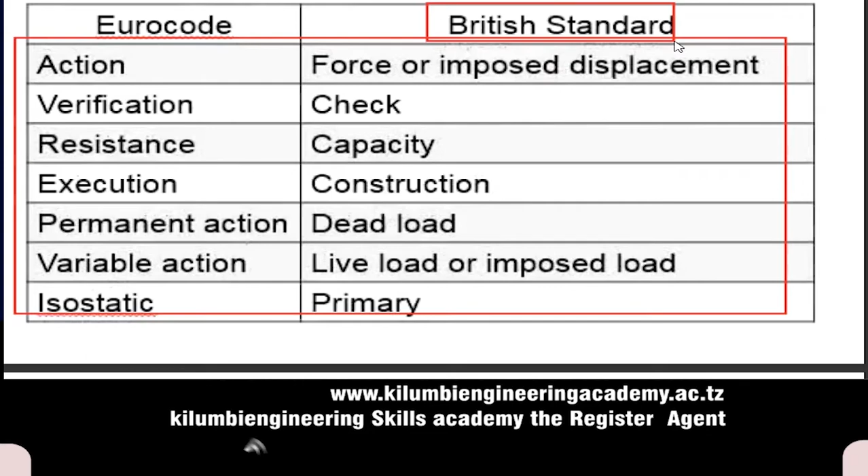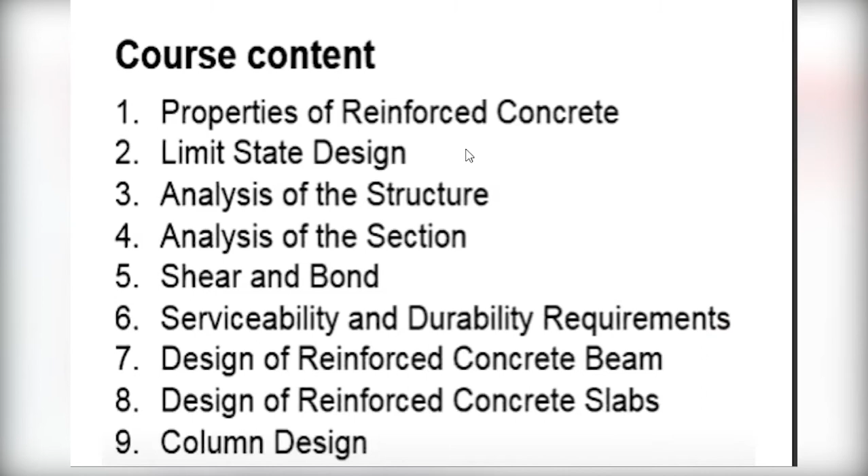Now, first, as we said, we start with the properties of the concrete. The properties of reinforced concrete are as follows: there's a so-called composite of concrete and steel. The steel bar is embedded in the concrete to strengthen the concrete in the tension area. We always say the concrete is good in compression.

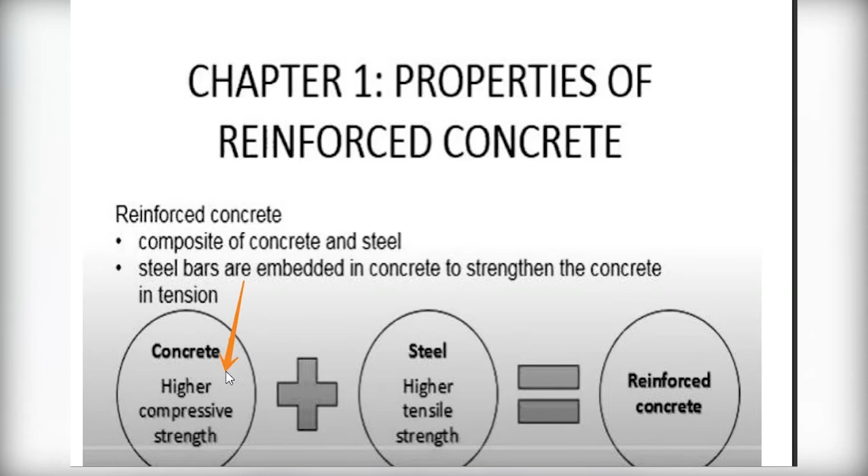So general properties of concrete: it is higher in compressive strength, and if you add the so-called steel or steel bars, which have higher tensile strength, what you get is the addition of the compressive strength plus the tensile strength from the bar, you get the so-called reinforced concrete. That's why we call it concrete which is reinforced—it means concrete which is added with steel bars. So the definition of reinforced concrete is the summation of the concrete including the bars.

If it has no bars, it is called mass concrete. So the general properties of concrete are: it has the highest compressive strength.

Now, the general introduction. Reinforced concrete combines the best features of concrete and steel, which are complementary, as follows.

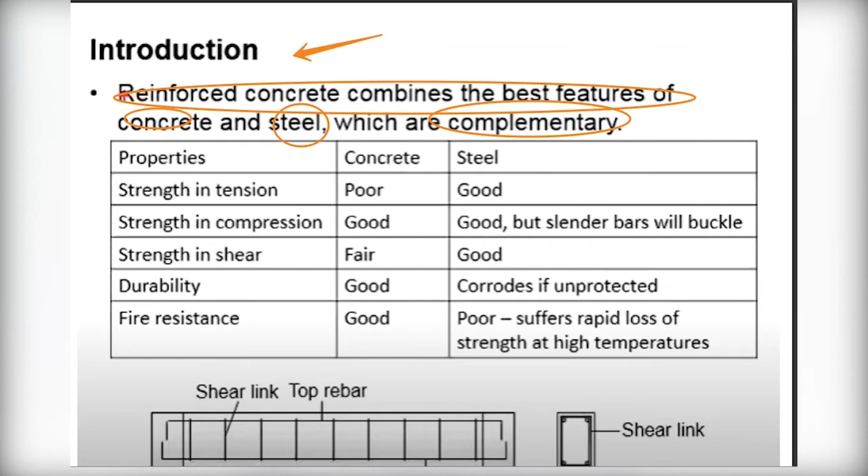Now the properties: here we have the concrete and here we have the steel bars. In terms of strength in tension, the concrete is poor, but the steel bar in tension is good. But in terms of strength in compression, the concrete is good, but the steel bar, if it is slender, will buckle. So note that the steel bar is not much good in compression, but it is good in tension. Once it is slender, the bar will buckle automatically.

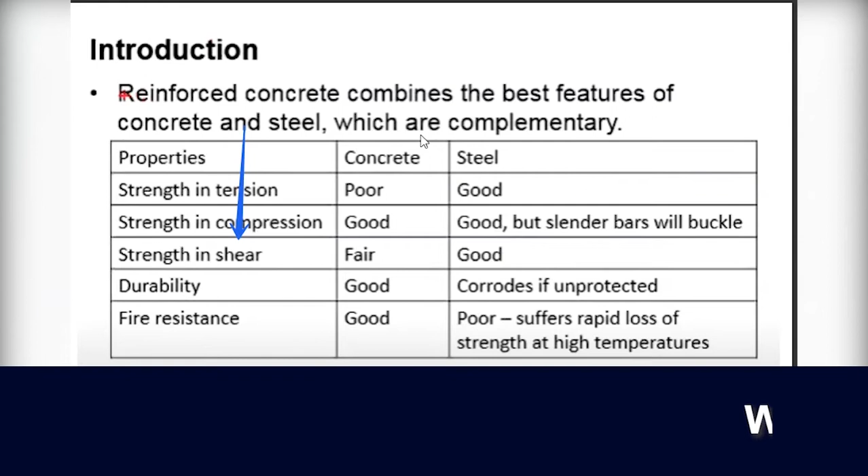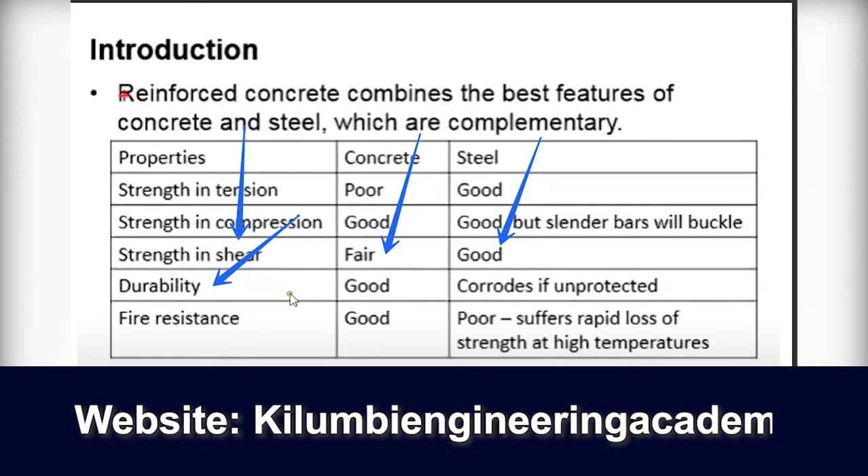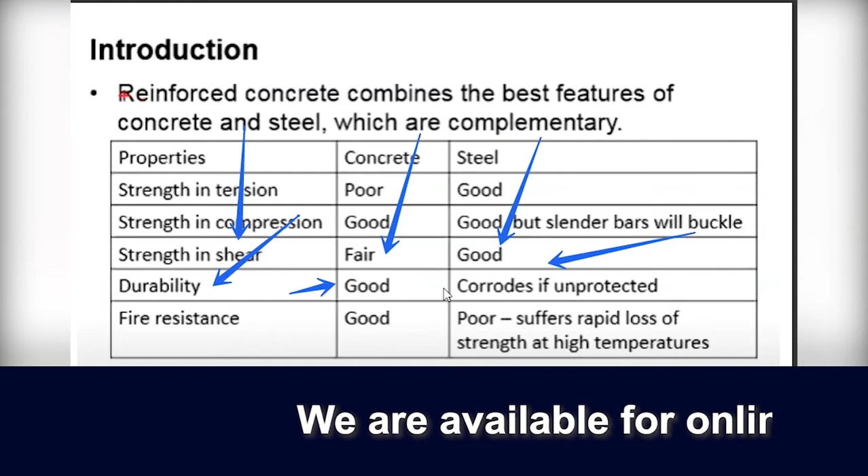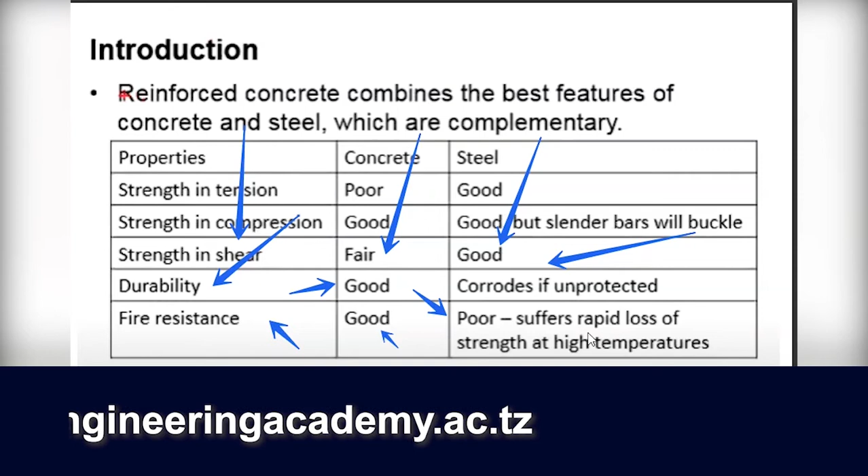Now, in terms of shear, the concrete is fair, while the steel bar is good. In terms of durability, the concrete is good, but the steel bar corrodes—if not protected, the steel bar will rust. In terms of fire resistance, the concrete is good, but the steel bar is poor—it suffers and rapidly loses its strength once the temperature is very high.

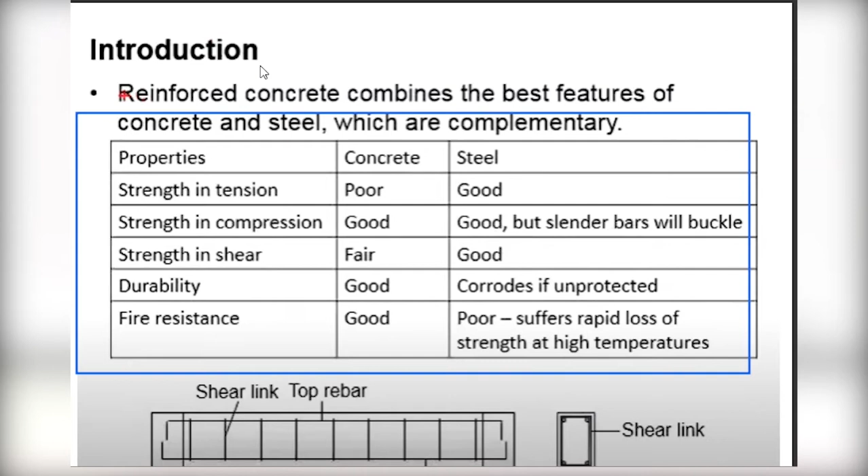So that is the general properties in both members, in terms of concrete and in terms of steel.

So comparing concrete and steel: in terms of tension, concrete is poor, but steel bar is good in tensile strength. Vice versa, in terms of compression, concrete is good, while steel sometimes buckles automatically. In terms of shear, concrete is fair, steel is good. In terms of durability, concrete is good, while steel corrodes once not protected. In terms of fire resistance, concrete is good, while steel is going to lose its strength at higher temperatures.

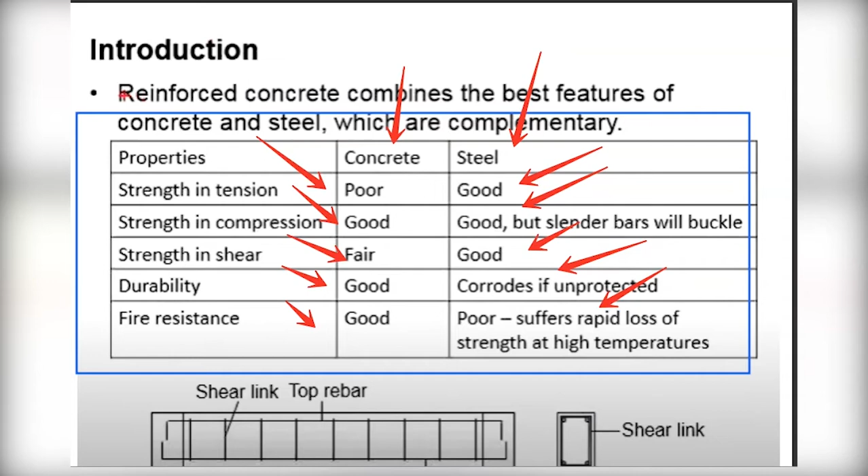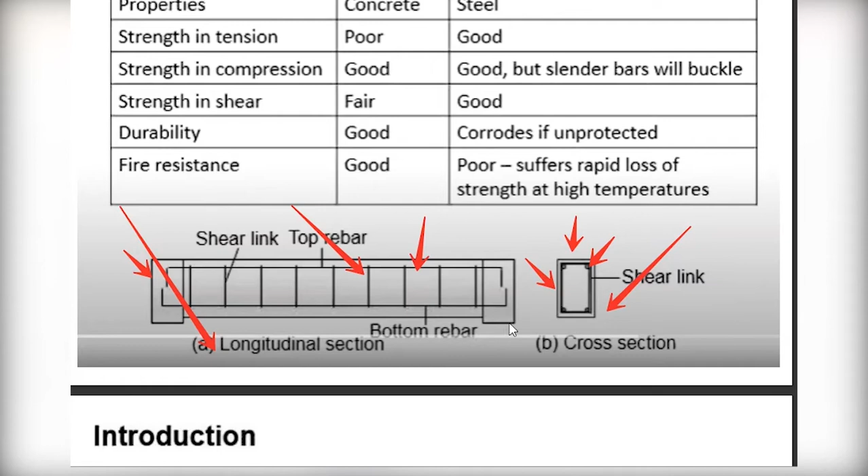So that's the general summary, and this shown here is some of the members in terms of longitudinal and cross-section. In longitudinal section, these are the bars and this is the concrete in the member—the bar is inside the concrete, that's what we call reinforced concrete. In terms of sections, you see the sections, the shear links, and the main bar, like that—that's the cross section of the members.

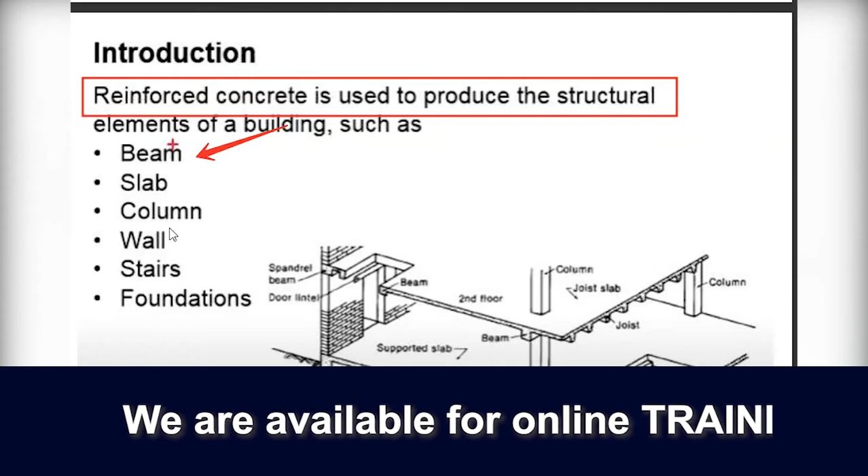So, general introduction: reinforced concrete is used to produce the structural elements of a member, building, or structure. Such structural members include the beam, the slab, the column, the wall, the stair, and the foundation. Here are some of the members—this is the stair.

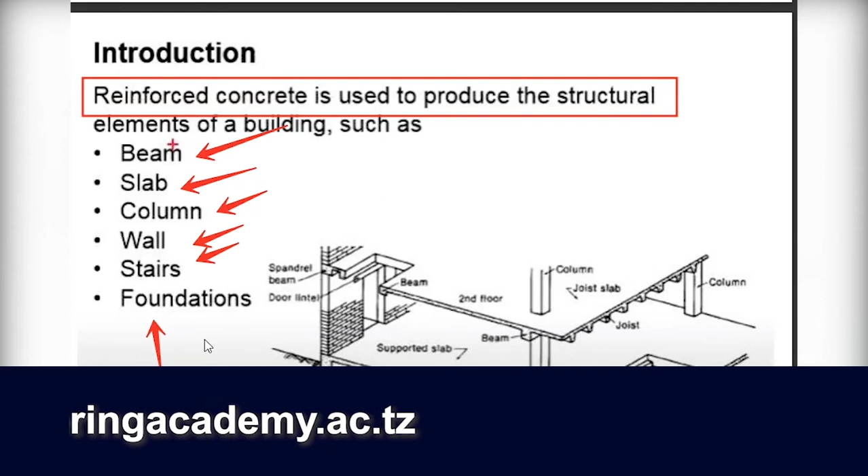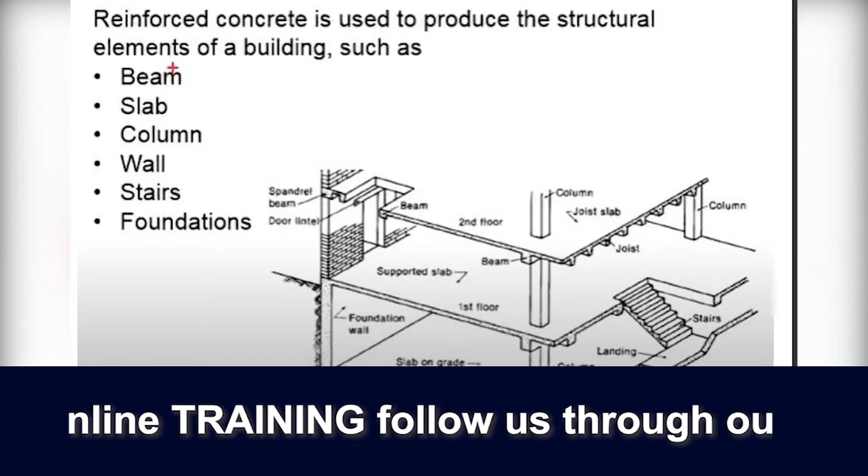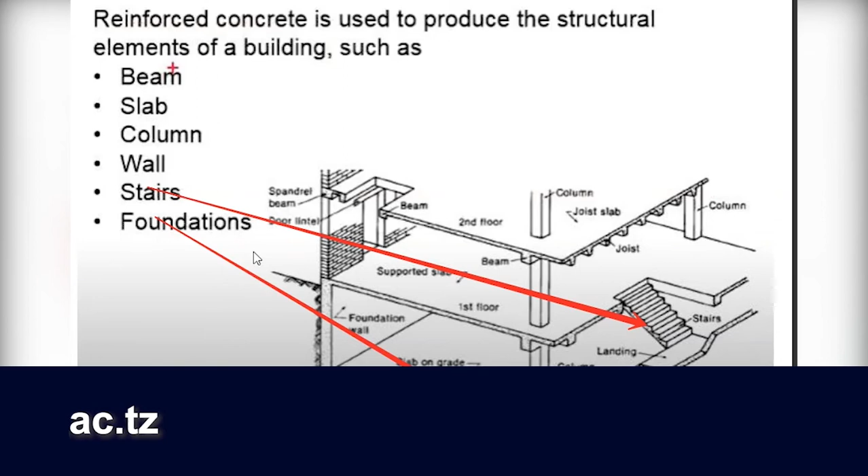This is the foundation sample, pad foundation, and this is the sample of the stair. If you consider about the wall, it depends - sometimes it might have like this one, and this is the column.

The slab is like this one, and the beam is the one which carries the slab. So the beam might be like this one underneath of the slab, or like this one underneath of the ribbed slab. So those are some of the members in the structures.

So to ensure the structure is safe and suitable for occupancy with minimum cost, stage 1 we need to have the so-called planning. In planning, there is a client summary, there is a function of the planning, the nature of the structure usually, environmental structure factors, economical factors, site survey, and the structural configurations. These are all in the planning stage.

While in stage 2, the structural analysis, here we consider the design constraints, the action, the static equilibriums. This is in terms of force, reaction, internal forces, the moment, the shear, etc. The material properties, strength, elasticity of the material - everything is in this second stage.

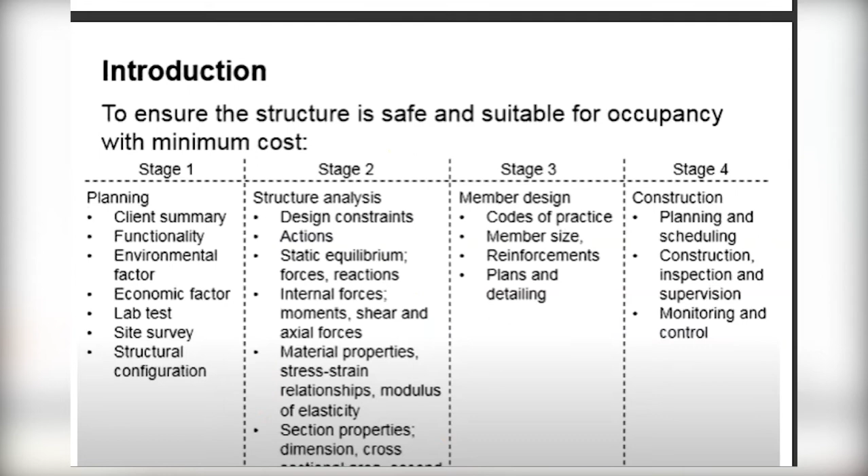Once you consider the second stage, these considerations should be taken into account, as described here. You pass through and can see in the second stage which considerations should be taken.

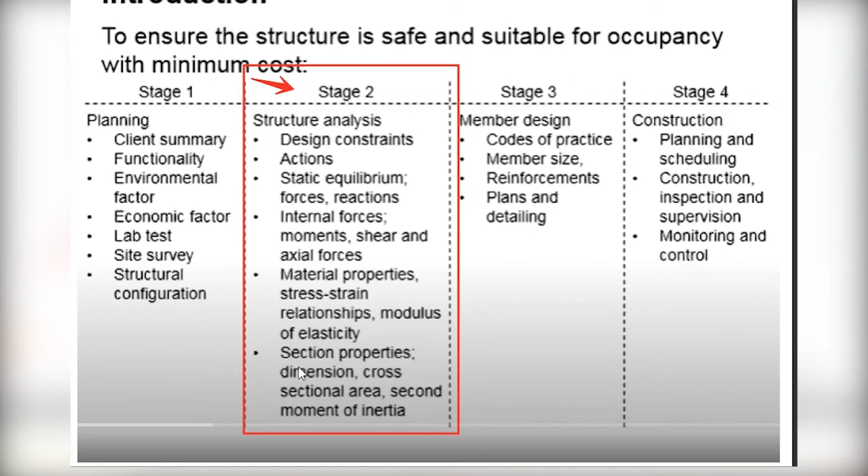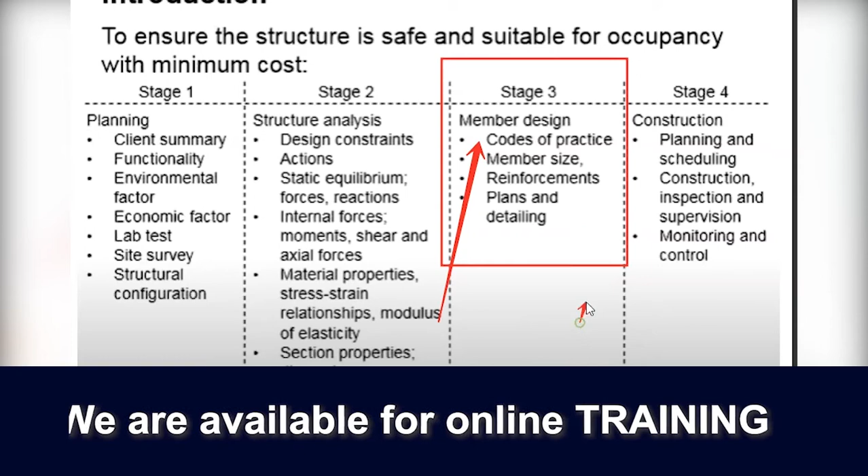So on the third stage, you consider the member design. Once you consider the code of practice, maybe you use BS code, or Euro code, or Indian code, Brazil code, etc. It depends on the nature, whether it is reinforced concrete or steel structure or bridge structure, whatever. All this consideration is in stage number 3.

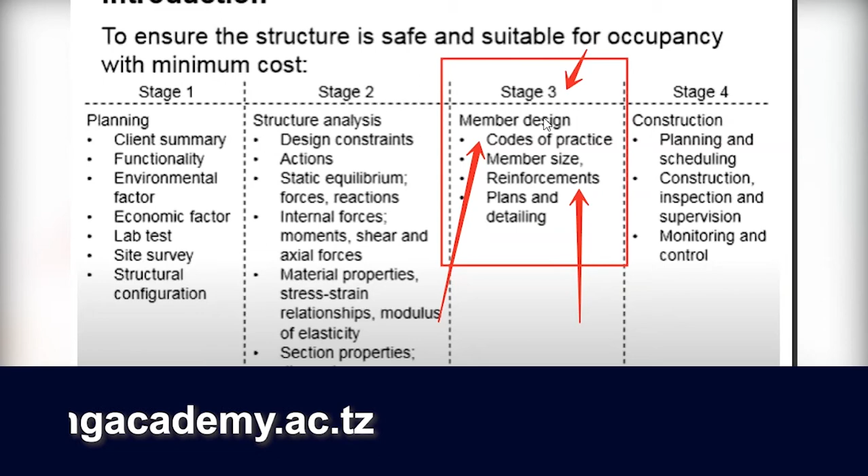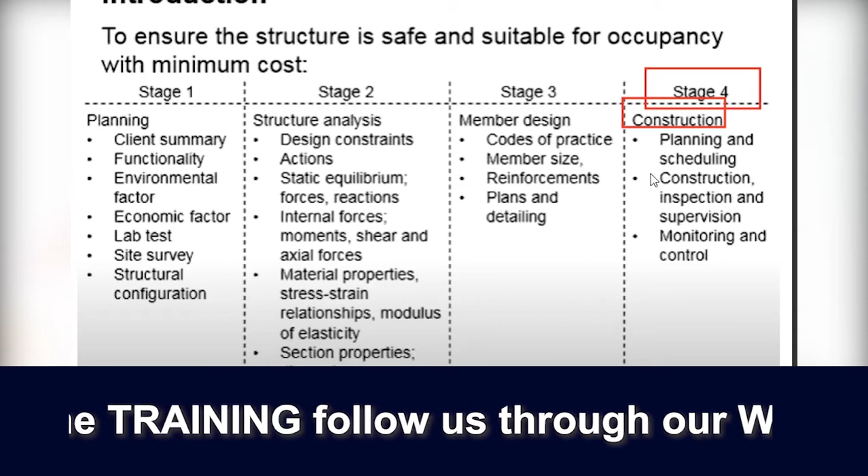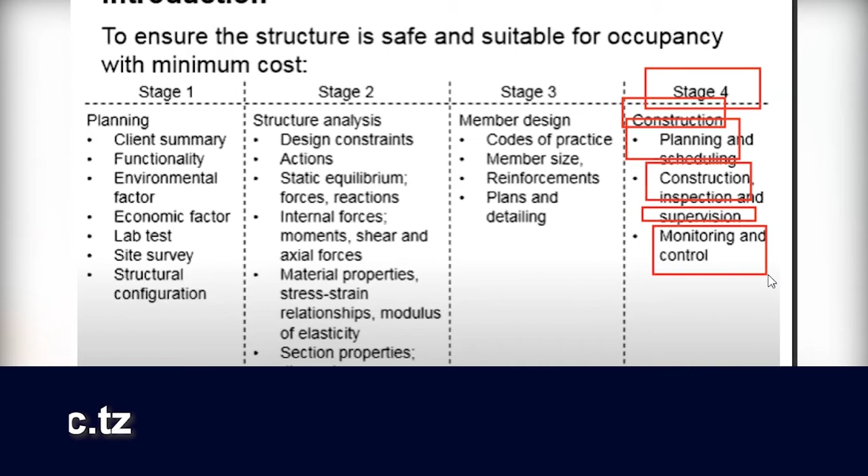And once you go to stage number 4, this is the construction stage. Here is the way you implement both the planning stage and the construction, the inspection, the supervision of the structure, and the monitoring and quality control. Both of these are at stage number 4.

So the composite action - concrete is weak in tensile, about 10% of the compressive strength. Now, the design assumption is as follows. We say that concrete does not resist the tensile strength - this is the first assumption. The second assumption: the reinforced steel carries only the tensile force, in which it transfers the bond between the interface of the two materials.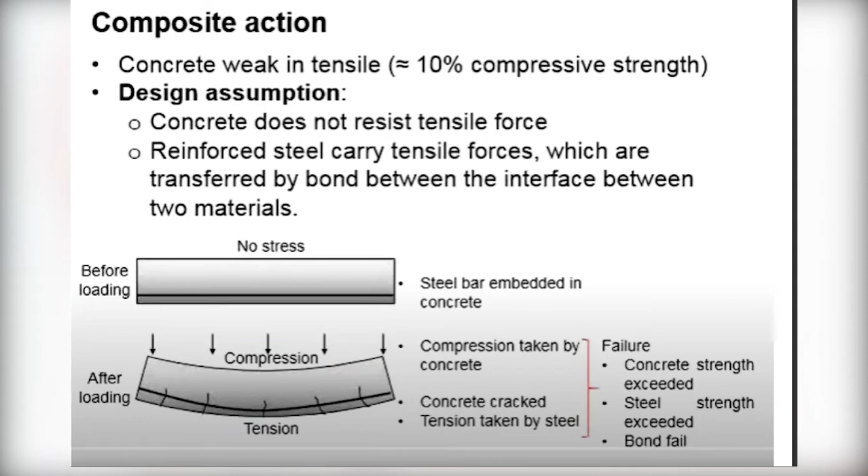So before there is no stress, the member will be horizontal like this one - here no load is applied, meaning no stress appears, as if you have your member and there is no load appearing above or on top of it. But once you load it, the upper part appears as compression, and this is the part of the concrete. It means it appears as compression, while the bottom part appears as tension. So by this way, we assume our member is in compression above while it is in tension below. This is after loading - here is before loading.

So by that way, we can say that the above part takes the compression - that is the concrete, while the bottom takes the tensile - that is the steel bar. So you have compression and tension. That's why failure occurs: once the concrete strength is exceeded, or once the steel strength is exceeded, or the bond fails - meaning the bond between the concrete and the reinforcement fails. So always the member will appear to fail.

These are the general rules, the general explanation of how the concrete member appears once it is loaded or before loaded. As we said, before loading there is no stress, and after loading the top part is compression while the bottom part is in tension. So this is how the assumption comes: we assume that the concrete has no tensile force, meaning the tensile force is all carried by the steel bar member. That's the assumption.

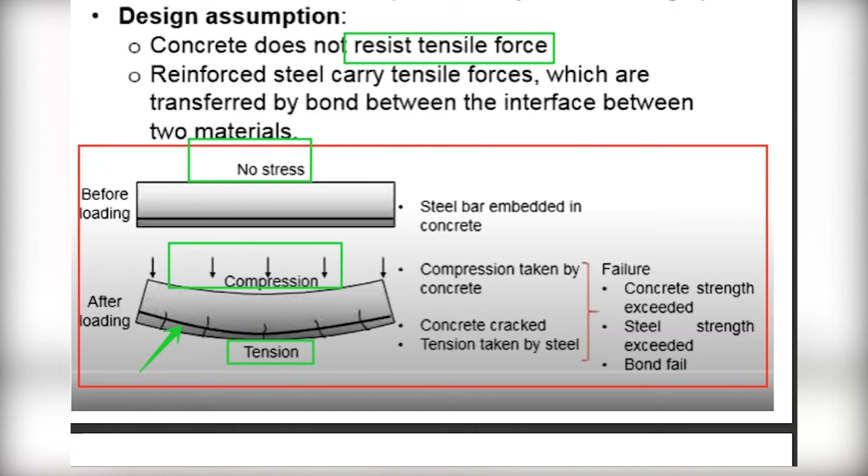Now the composite action. If the bond is inadequate, the reinforced bar will slip, and there will be no composite action.

Also, when the bars are normally ribbed, there is an extra mechanical grip. So the assumption is that the strain in the reinforcement is equal to the concrete, meaning the grip depends on the nature of the reinforcement, whether it is plain or ribbed.

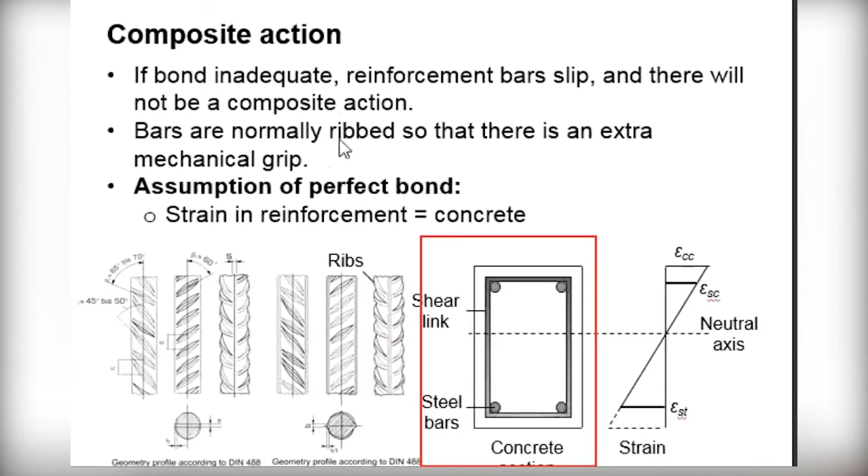So by the assumptions, if this is the section of the member of the concrete - now if we consider this section of the concrete member - the centroid or the neutral axis is assumed like here.

This means the above part appears as compression, while the bottom part appears as tensile. Means if you have the triangular - if we take this one as a section like this, and this is the center or the centroid of the member, your properties appear like this one. The above part appears in compression, while the bottom part appears in tension.

This portion has a force for the compression - the force for the concrete, while the bottom one is resisted by the tensile. As we assume the concrete has no resistance to tensile, the bottom one is only resisted by the tensile bar, while the top one we assume is resisted by the concrete. So the upper one is compression, while the bottom one is tension.

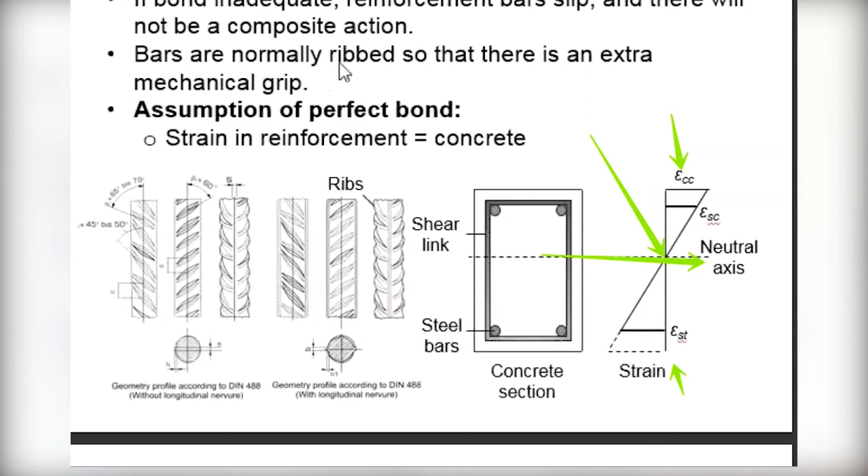Now we look at the so-called stress-strain relationship. The relationship between stress and strain is as follows: the load on the structure causes distortion of its member, resulting in stress and strain of the concrete and the steel or reinforcement bar. This analysis of stress and strain is based on equilibrium of the forces.

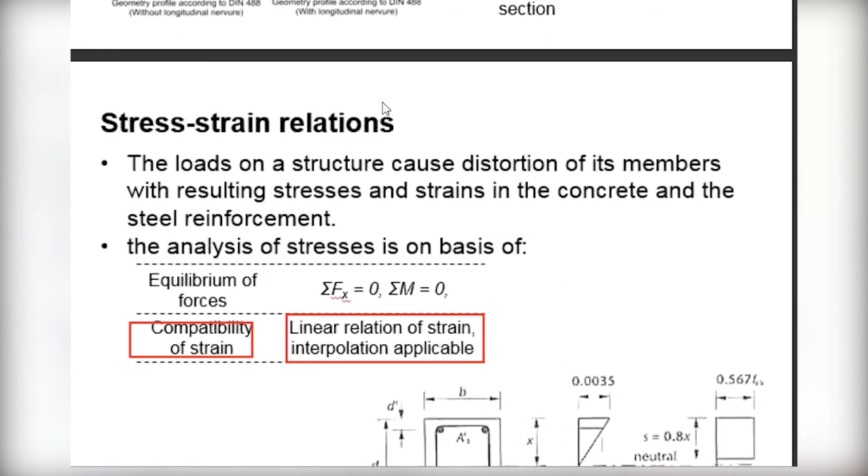The horizontal force is equal to zero, and also the moment is equal to zero - this is the basic engineering principle. So if we assume the compatibility of the strain, the linear relationship is developed as interpolation, as we see in the diagram.

As we assume this is the section of the concrete, from the neutral axis like this one, as we said, the above one undergoes compression, while the lower one undergoes tension. This means above we have the strain of the concrete, and lower we have the strain for the steel from the neutral axis here.

But once your section has a depth of D like this one, if you take from the center of your bar above to the top of your section, you create a certain distance, say D dash. The distance from above to the neutral axis is assumed as x.

Also the width is carried as b, and below we have the area for the reinforcement, or As, and above we have the area of As'. So the strain relationship is like this one. As we said, this is like a triangle.

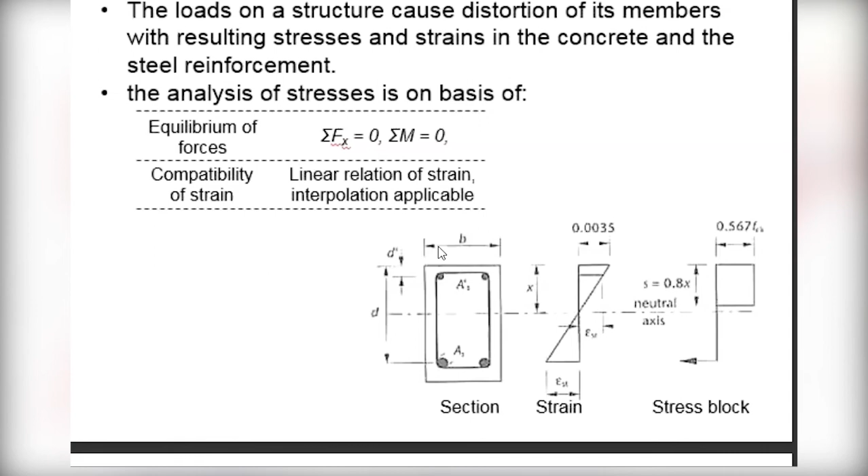So we have the so-called stress block, and this was the strain relationship, meaning the stress-strain relationship. So now, what is the so-called concrete strength? The concrete increases its strength with age. The rate of increase also decreases with age. We assume the concrete matures at about 28 days. So Eurocode 2 does not permit the use of the strength above 28 days in calculation.

So we assume the concrete strength at the age of 28 days is the assumed strength. So if it is grade 30, after 28 days we assume the strength will meet the assumed strength of the concrete. Empirically, we say after 3 days it is 1/3, after 7 days the strength should be at least 2/3, and after 28 days the full strength appears. So that is how we assume the concrete strength after casting.

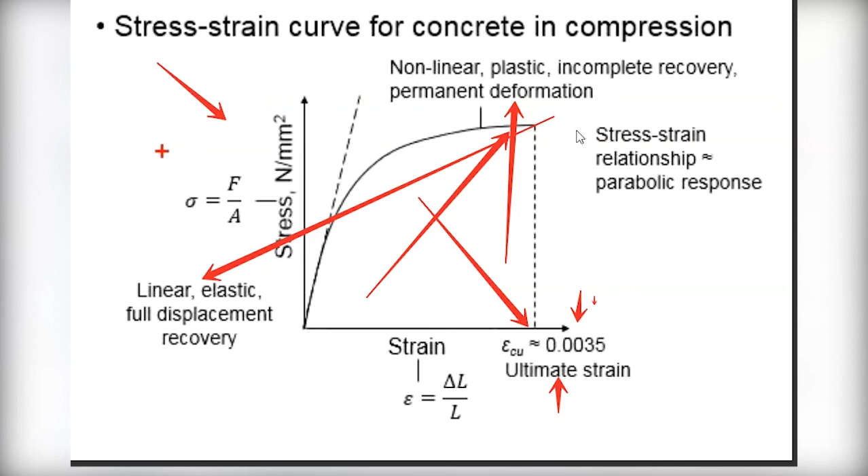The value is estimated empirically as 0.0035, and this is the assumption for the ultimate strain, at which the member, once loaded and stressed, undergoes permanent deformation. It won't go back to its original dimension. That's why we say the stress-strain relationship is the so-called parabolic response. Under that circumstance, the stress-strain relationship of the concrete is of this nature.

Now, as we said, the nature is sometimes linear, and then it becomes parabolic once it is loaded. So the value for the stress or the strain is this one here. But this is the so-called design stress, and the design stress is lower than the characteristic strength of the stress-strain relationship.

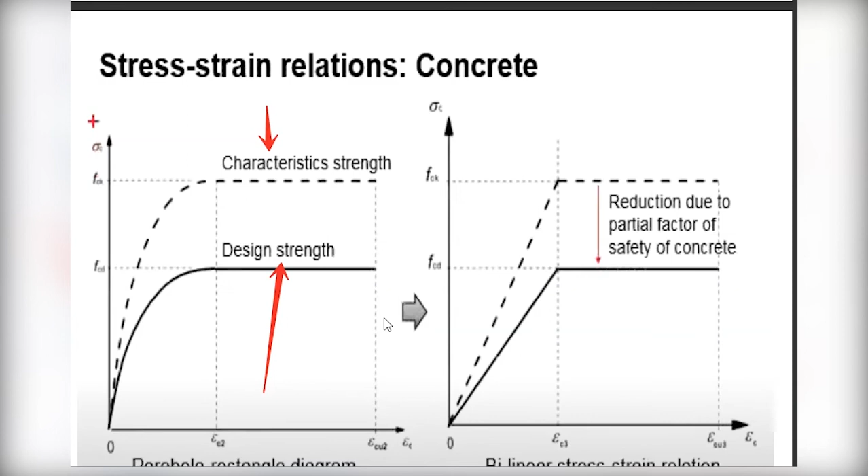Because this is parabolic in nature, they said that the design stress is lower than the characteristic strength. It means if the characteristic strength is fck, the design strength is fcd. This is reduced by a certain percent, and the reduction is due to the so-called partial safety factor.

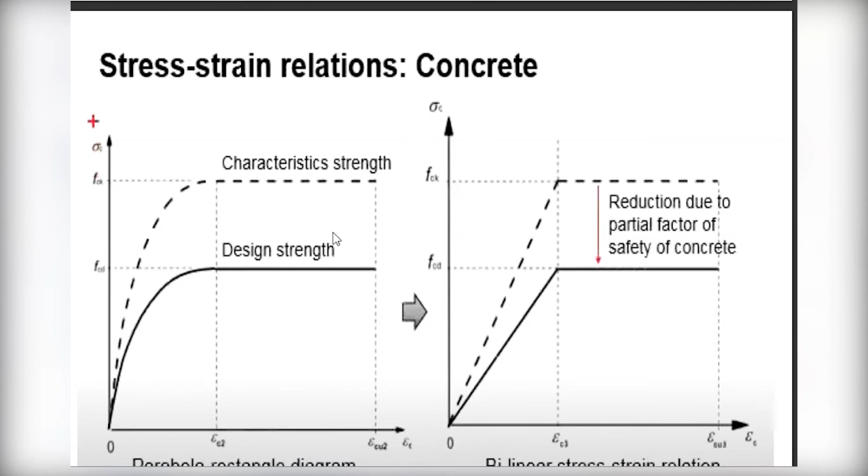It means we assume the structural member can suffer the consequences of something unforeseen. So we must have a so-called factor of safety to account for any contingency in the structural member. That's why we say the relationship is bilinear, a bilinear stress-strain. This is for simplicity: we assume it is linear, while normally it is parabolic.

That's why if we assume it is equivalent to linear, a certain percent is reduced from the characteristic strength of the concrete to the design strength. The design strength is always lower than the characteristic strength. That's the point to note. The amount which is lowered is given. Let's proceed.

Now, the stress-strain relationship of the concrete. The compressive stress has traditionally been measured and expressed in terms of cubes. How do we measure it? We measure it from a 150 mm cube under crushing. After 28 days, we have the characteristic strength, or compressive strength, of the concrete.

We can also measure it from a 150 mm diameter cylinder, about 1 foot long, or about 300 mm or 30 centimeters long. The cylindrical strength is estimated at about 60% of the cubical strength. So the equivalence between cubical and cylindrical is that cylindrical is taken as about 60% of the cubical.

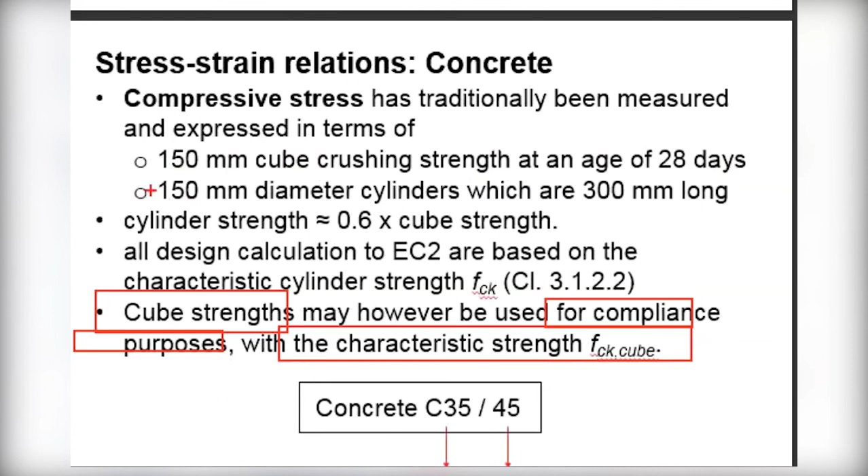Now all the design calculations in the Eurocode are based on the so-called characteristic cylindrical strength. This is under this clause, which you can follow in your own time. The cubical strength may, however, be used for compliance purposes, in which the characteristic cube strength is as follows, for example grade 35 to 45.

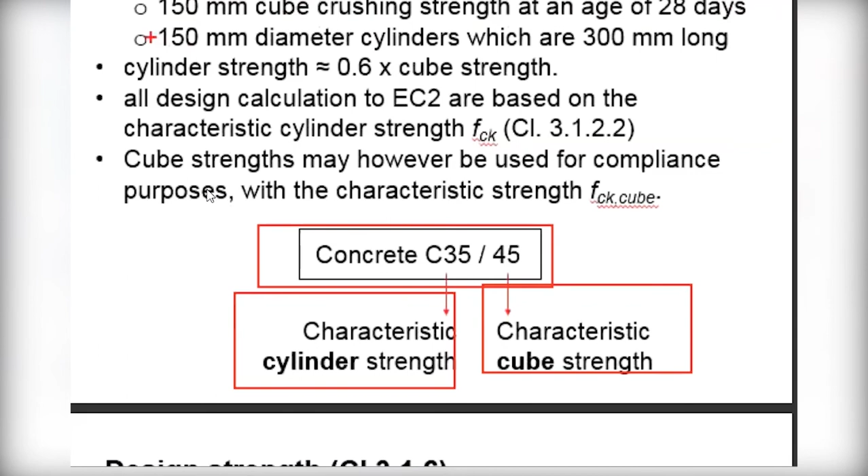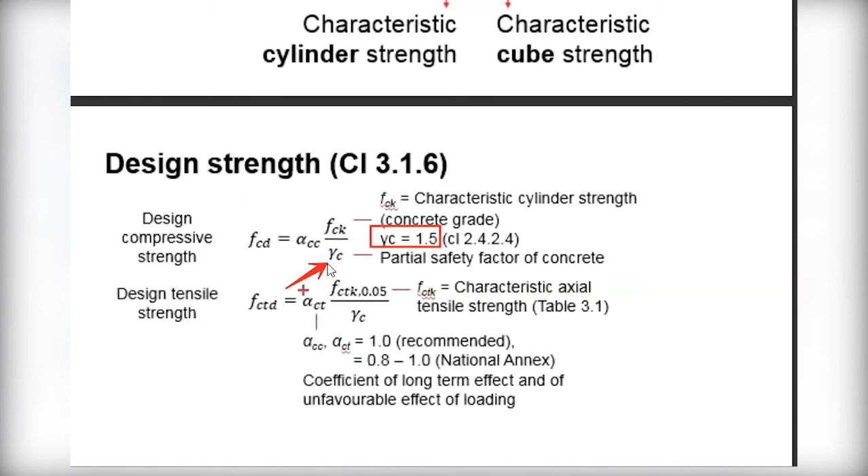Now you can go to clause 3.1.6, where we have the following. fck refers to the characteristic cylindrical strength. The compressive design strength, fcd, is the coefficient times the characteristic strength over the partial safety factor of the concrete. This refers to clause 2.4.2.4, which gives the partial safety factor of the concrete as 1.5.

For the tensile design strength, it is the same: the recommended coefficient for long-term effects times the characteristic strength over the partial safety factor. The value alpha cc is recommended as 1, or varies between 0.8 and 1 per the national annex. This is the general formula: design strength is the characteristic strength reduced by the partial safety factor of the material, depending on whether it is steel or concrete.

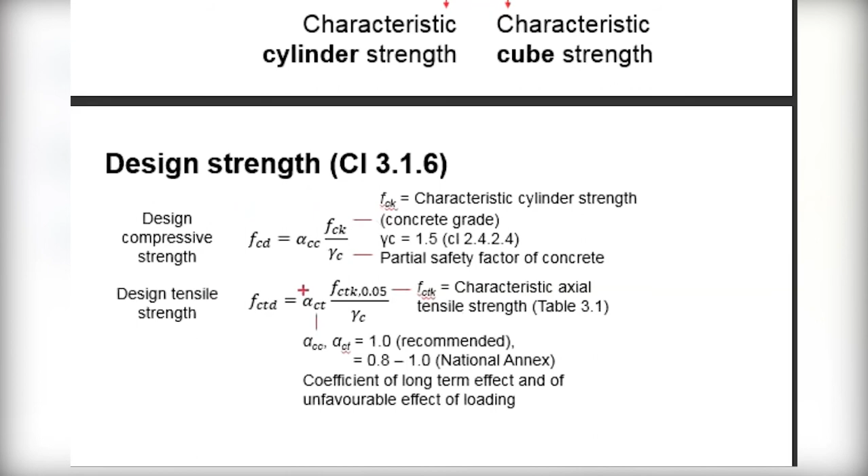From table 2.1 of the Eurocode, the partial safety factor for concrete in the persistent and transient situation is 1.5, while for accidental it is 1.2. For steel, the persistent and transient value is 1.15, while the accidental is 1.0, the same for prestressing steel. This is how you take your partial safety factor according to table 2.1 of the Eurocode.

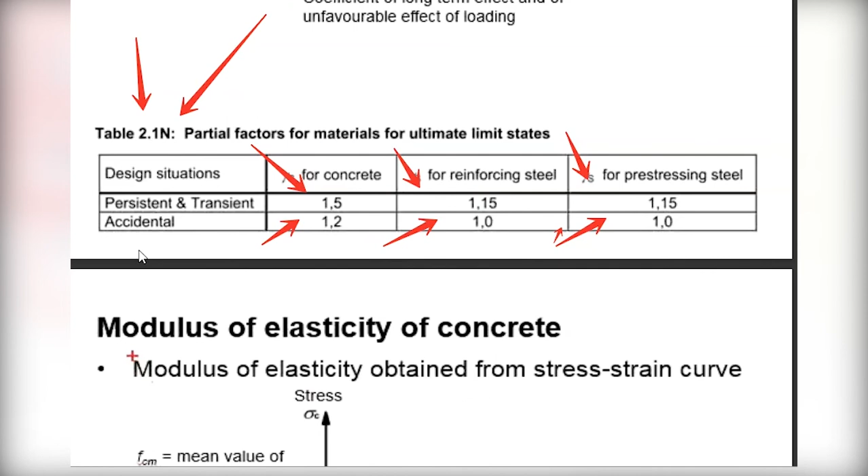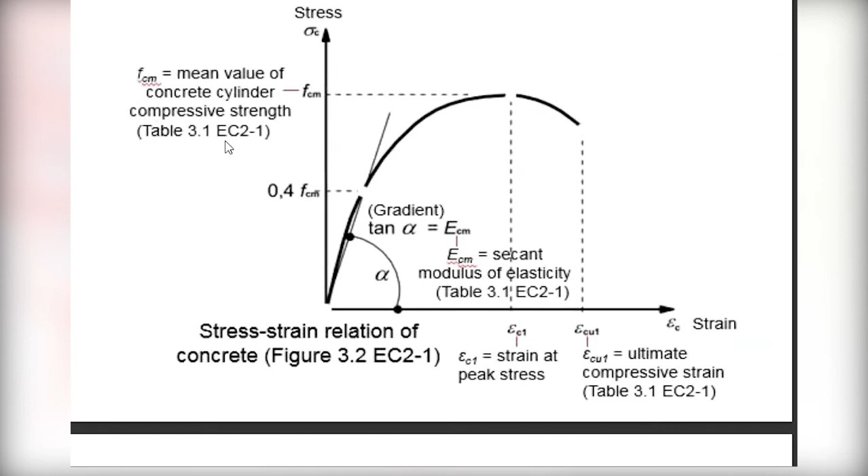Now the modulus of elasticity of the concrete. The modulus of elasticity of the concrete, once you take the relationship of the stress strain, now once you take the relationship for the strain versus stress, you can have, as we said previously, that it is started as linear.

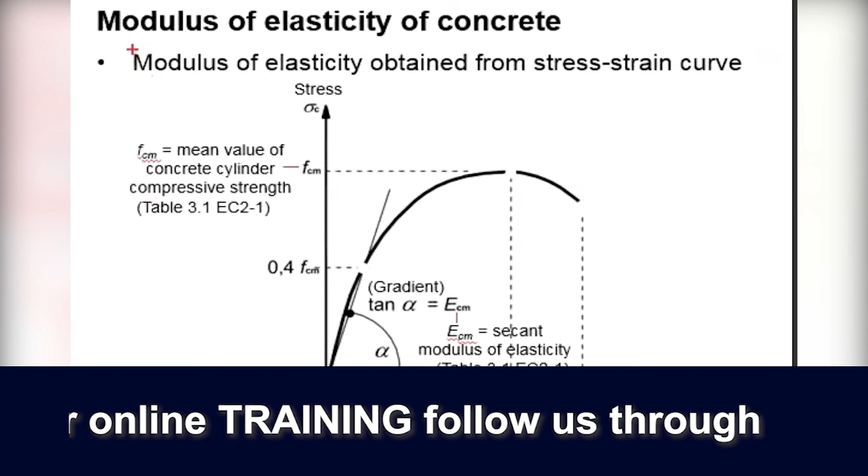The starting point here is linear, but, as we said, it is going to parabolic like this one. So on the linear point, you can have the gradient here. The gradient is at about 40% of the mean strength or characteristic strength. So 0.4 times fcm, but the mean value of the compressive strength is above here.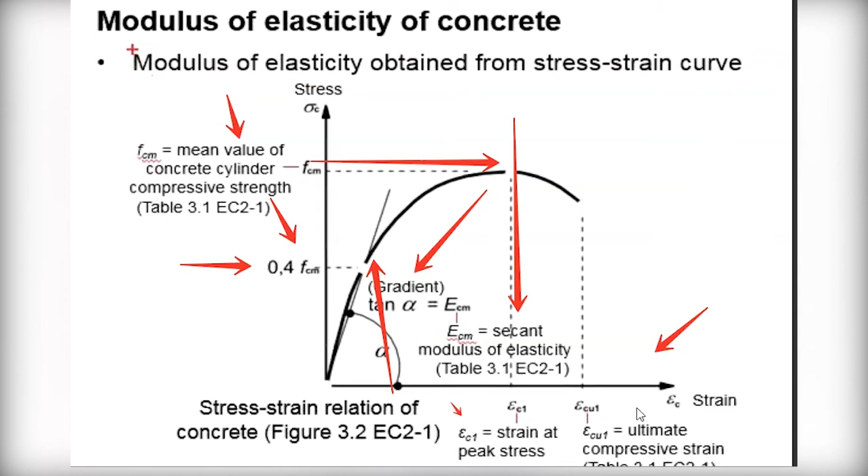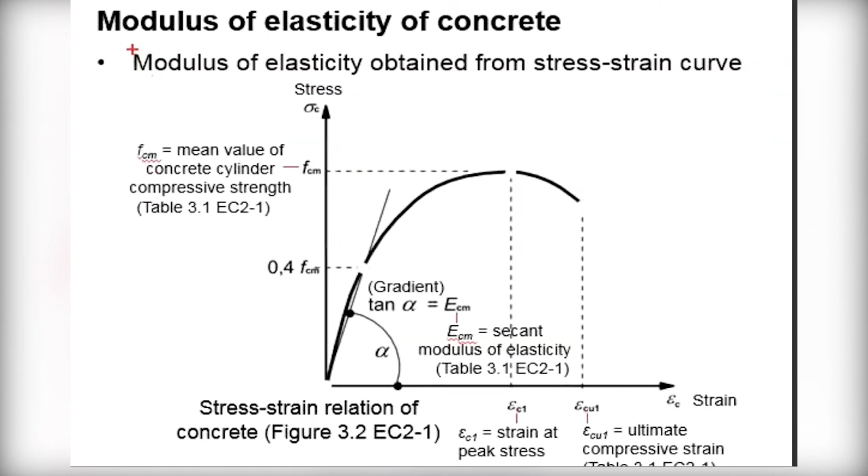So the tangent here, the gradient, is the ratio between the stress versus the strain. So here you can have your strain at peak, and here you have the ultimate compressive strain. It means the strain now is the ultimate, in which the member undergoes the deformation. So now this one you can have from table number 3.1 as per Eurocode.

So from the relationship between the stress and strain, you can define the so-called E. So the tangent means the ratio between the stress versus strain. You have the so-called modulus of elasticity, and by table 3.1 you can have its value. Now if you consider this table, you can have the modulus of elasticity for the concrete.

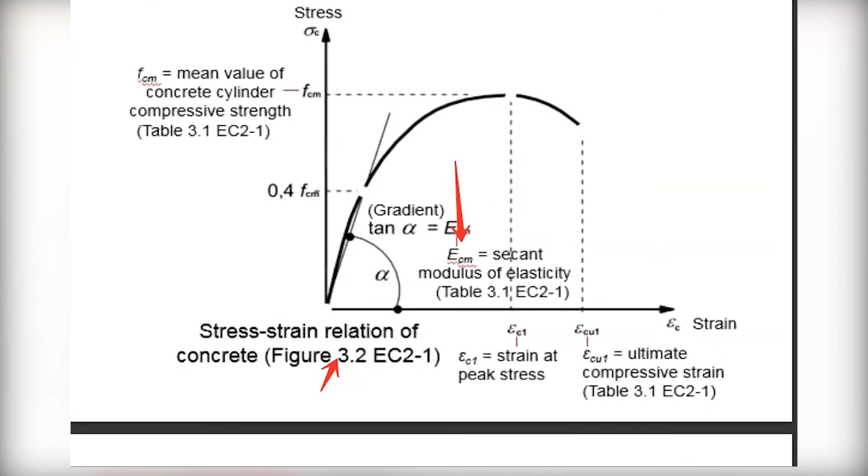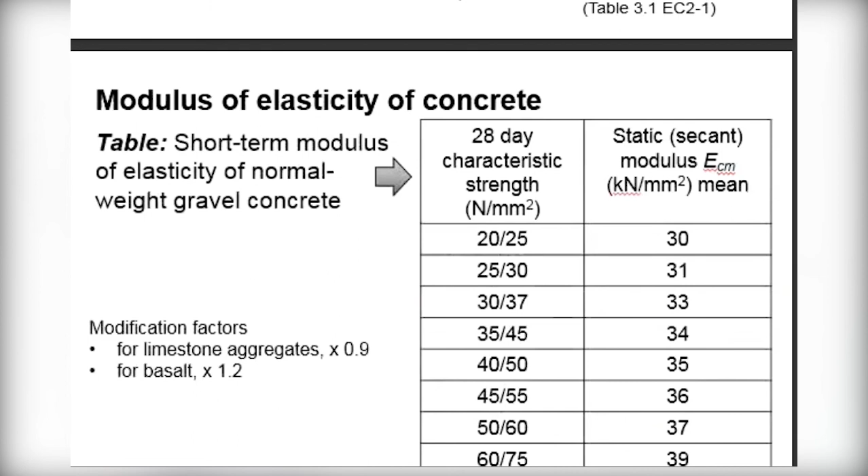Now the value for the E, or the modulus of elasticity of the concrete, as per the table, is a function of the grade strength. If it is assumed a grade 20 to 25, the value of E is about this one. So the value is respective to the grade strength. So you can pass through that table, and you can have whatever estimated value you need. We always say that the modification factor is about 0.9, and this one 1.2, if you want to modify the values which you got.

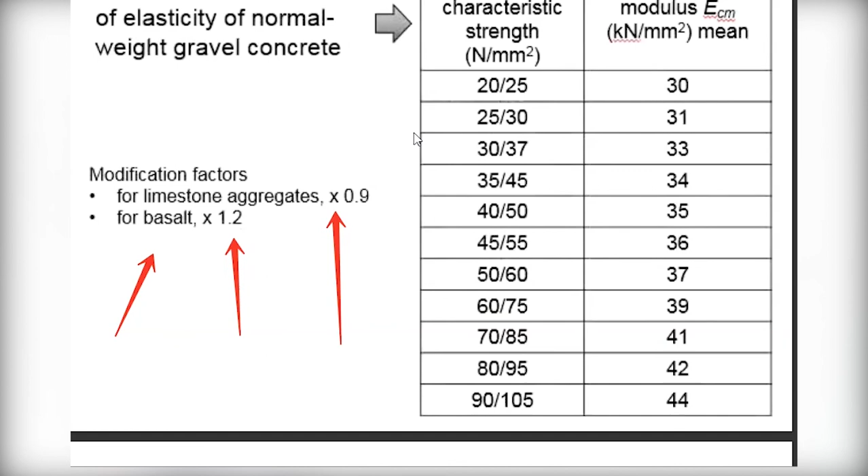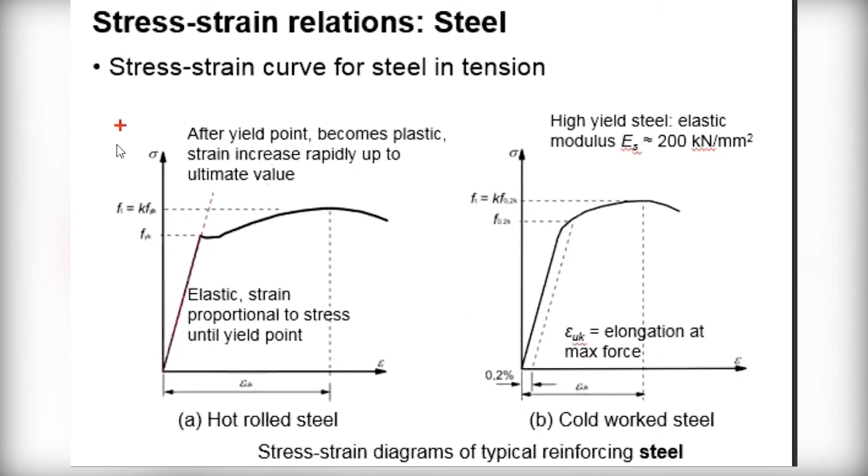Now also, we have the two relationships, as we said, the stress strain relationship. The first one is for the hot rolled, and this is for the cold worked, and this is the high yield E for the hot and cold working steel. Also you can have this nature for the hot rolled. It means here it has got a kink before undergoing the parabolic, while here it is going linearly and straight to parabolic.

This is vice versa, a curve between the hot rolled and the cold worked, and this is the stress strain relationship for the steel once it is loaded, and it depends on whether it is hot rolled or cold worked. The curve is different. Here it goes linear and it starts to lower before going to parabolic, while here it is going linear, changing abruptly to parabolic. And this you can get from this figure as per Eurocode.

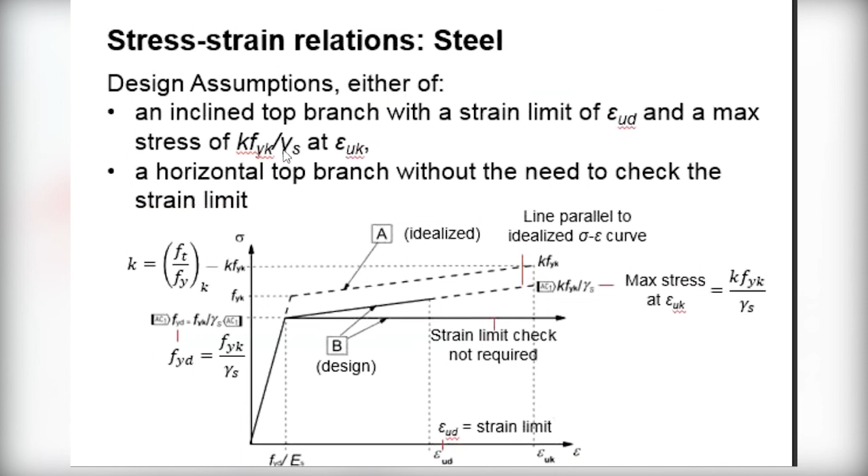Now also for the stress-strain relationship for the steel, we say that the inclined top branch goes to the strain εud, and the maximum stress is k fyk over the partial safety factor at a certain value. Or a horizontal top branch without the need to check the strain limit, as in this graph, which gives the linear relationship. So the value of k is a function of this one, while the design and the characteristic strength, as we said, should be lowered to allow the partial safety factor of the design. So this is the relationship between the strain and the stress for the steel.

So the graph is this one, and this is per the Eurocode figure number, that one, where ft is tensile stress and fy is yielding stress. Now the value for the maximum stress is in this function.

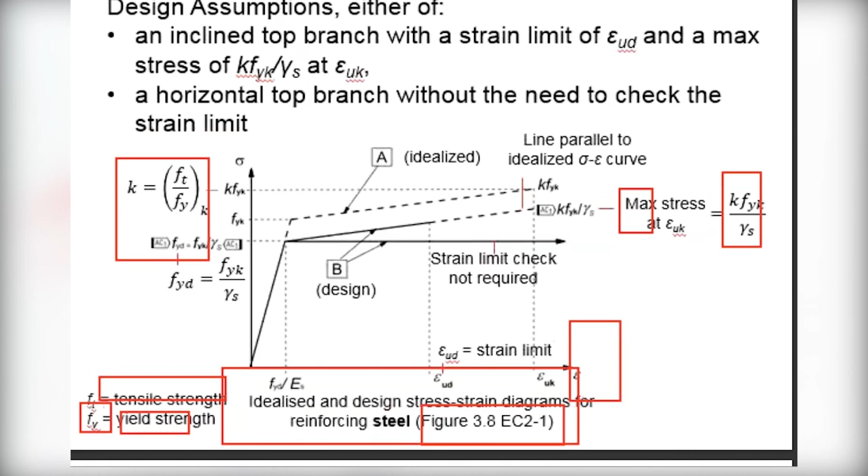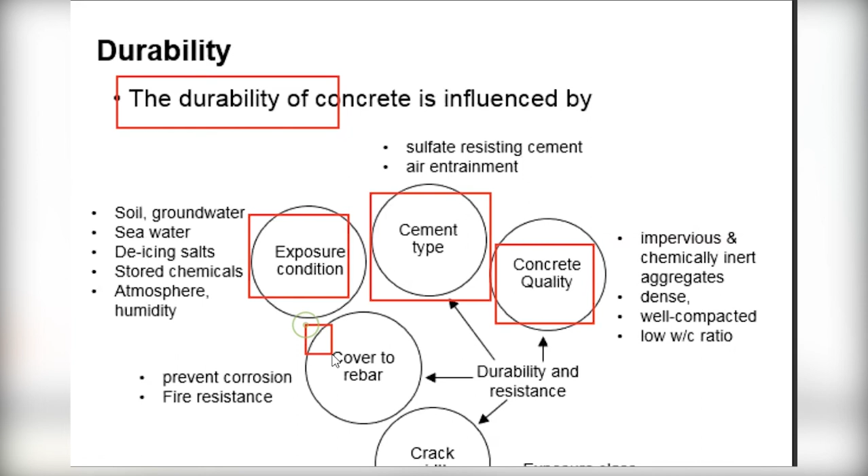Now the durability. Durability of the concrete is influenced by the cement type, the exposure conditions, the concrete quality, the cover of the reinforcement, and also the conditions, whether the soil is groundwater or whatever. You shall see this condition is very important. Also the humidity of the nature.

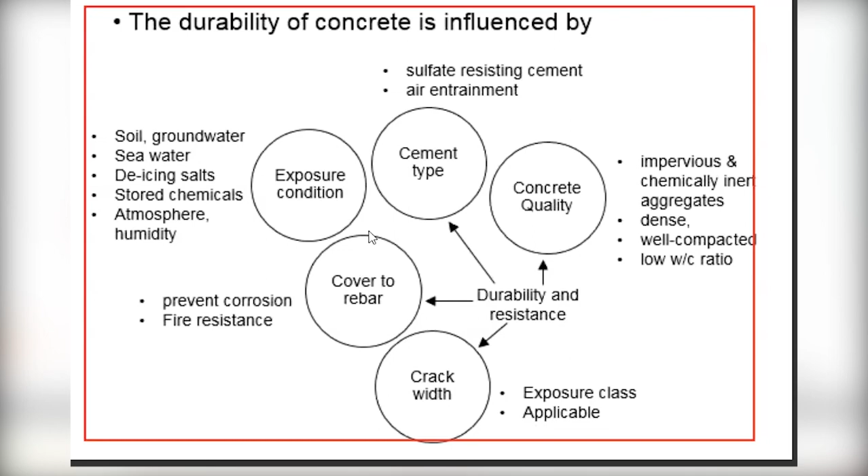Also if you take the imperviousness, whether it is chemical or aggregate, whether it is denser or whatever. So all these are the factors for the durability of the concrete. You may pass through and look how they affect each other, and these factors are very important for the durability of the concrete.